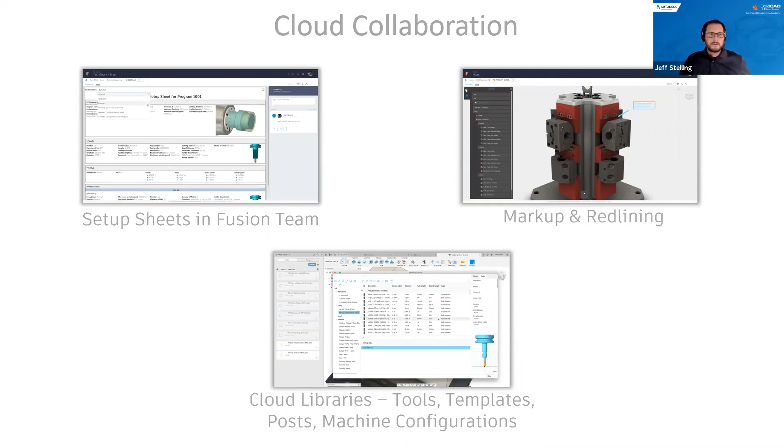I'm going to steal this share here. Can you see Fusion? Yeah, I got you, Jeff.

Okay, I was talking about the cloud-based access to the files at all times. I'm going to make a change on this file, and I'm going to have Mike have it open on his end. As soon as I make these changes, he's going to be able to open up the file on his end, the change will be automatically made, and then he can regen his toolpath.

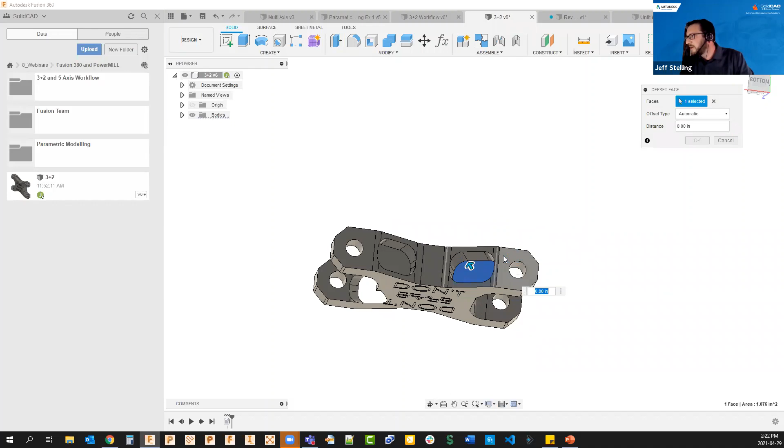Just let me know when you want me to steal the presentation, Jeff. So I'm going to make a couple quick changes here to the model. Sorry about that. And I'll change this one right here too. Forgot to hit OK there. And I'll change this one.

So what I'm showing you is how easy it is to make design changes. If your customer contacts you and says that there's been a design change to the parts you're making, we can easily make these changes.

And being connected, as you can see, I can see that Mike has this file open already. I've made the changes to this file. So Mike, if you can share your screen, we're going to show you exactly how the ability to have the changes automatically made works.

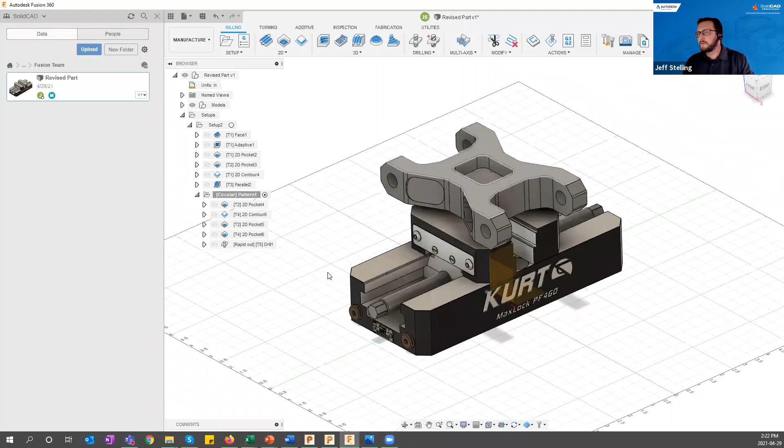Okay, so you got my screen here. You can see the part that I have. And now, if I go up into, which one is it here again, Jeff? Sorry Mike, I'm just saving the piece right now. Okay.

And like Jeff had mentioned, I can actually see up here at the top, it gives you a real-time view on what's happening, who's working on the part. I can see that he's just made a couple of changes in real time. So there's no delay, no worry about working with an old piece of CAD data.

So I was going to say, as you can see, Mike's getting the warning right there that the components are out of date, that there's been a change in design, and also on the model he's getting the warning.

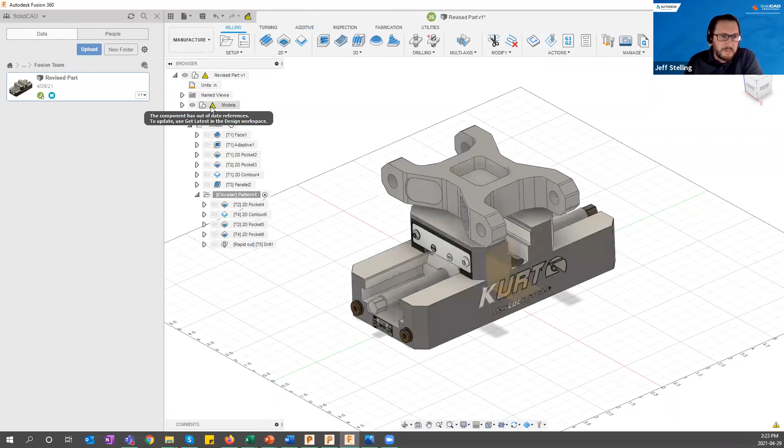So all Mike needs to do now is open up the models. Open up one more, Mike. Nope, there, right there. Okay. Yeah, you can just right click on that. Why did it not?

All right, do we need to? I'm going to jump back out and jump in real quick. Sorry about this hiccup here. That was this one down here, right? No, sorry, go into the Fusion team. Oh, there it is. You weren't, okay, there we go.

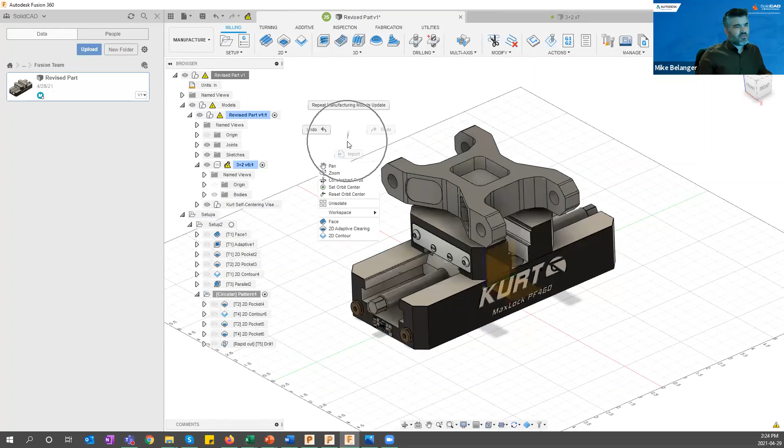All right, so obviously we have just a slight technical difficulty here with this. Basically, in the end, what's happening is you can see right here that there are different... Sorry, I was going to say, go into your design space.

Oh, that's it. So yeah, that's something we forgot to mention here. When you're in Fusion 360, because it's an all-in-one tool, we have a number of workspaces available. I was in the manufacture workspace where you're going to get all your toolpaths.

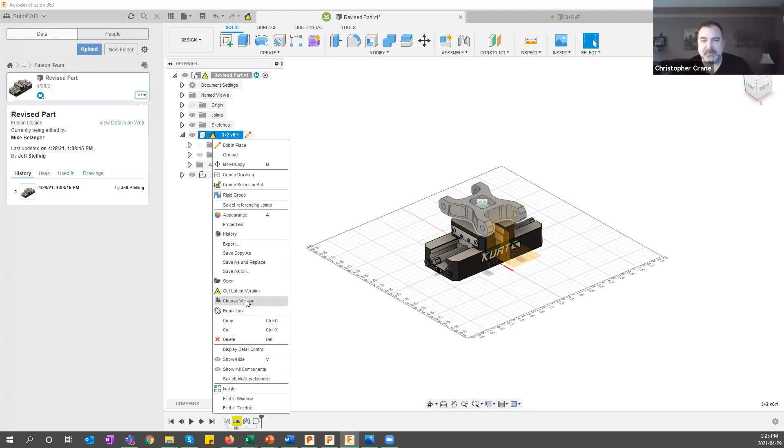This design portion is where now you can right-click on the model, choose version. So even though you're not in that workspace, Mike, it's still letting you know that there's been a change to that model. Exactly, and any stakeholders on this project are going to have the same data to work from.

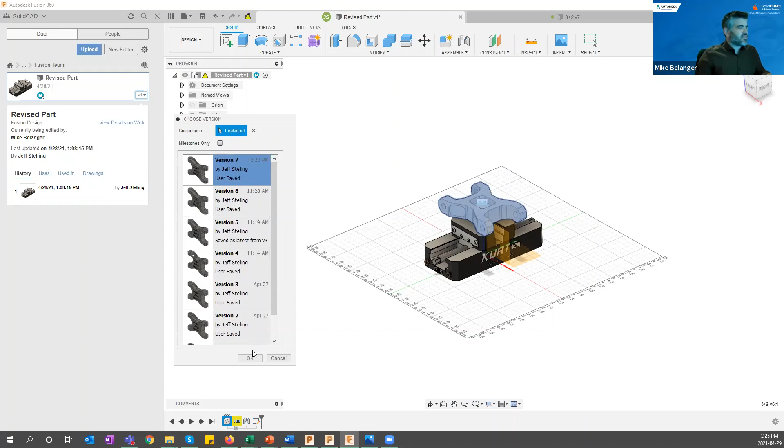Exactly. So if you look here, there's the current version that I'm in, the one that's highlighted. And I can see that this was last saved by Jeff 2 minutes ago at 2:23. So I can select this, choose OK, and it automatically updates the file.

And now if you go into your manufacture workspace, automatically it's letting you know that these toolpaths need to be regened. Just right click on setup there, Mike, and generate.

Now all these toolpaths are regenerating to the changes that I made to the file. So there's no more needing to jump to a third-party software, make the design changes, export it out as a STEP file or Parasolid file, email the change to the programmer or machinist, and then reprogram it. Even with the little hiccup we just had, within a few minutes our model is changed and programmed.

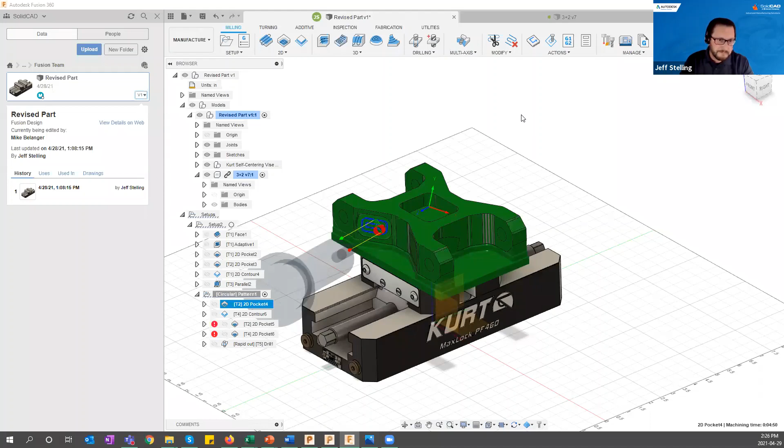Was there anything else you wanted to show on this one, Jeff? No, that was it, minus the few hiccups. I just wanted to show the ability to change. I'm changing the model on my end, and on your end you're able to receive that new design revision right away and update your toolpaths.

Excellent. Okay, I'm gonna share again. There we go, we got you. Okay, next slide to the parametric modeling. So that's on your screen now. Okay, so you want me to, let me go like this real quick. I'll let you share again, Mike.

Okay, so parametric modeling. What is parametric modeling? Parametric modeling is a design method that sets parameters instead of dimensions to specific parts of the model, the entire model, or specific parts of the model. Using this method allows users to easily change the model while keeping the integrity of the design. This allows you to reuse the same design for multiple projects.

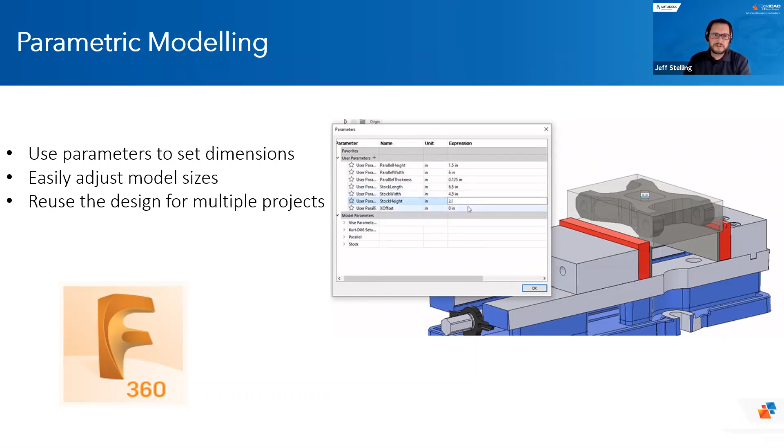Okay, you can see Fusion. Got you. Okay, so right here you can see I have all my toolpaths programmed for the first setup of this part. Now let's say I come from a job shop atmosphere where we did components for tool and mold, tool and die, automation, robot components. A lot of times you would get parts that had multiples, 10, 15, 20 of the same model.

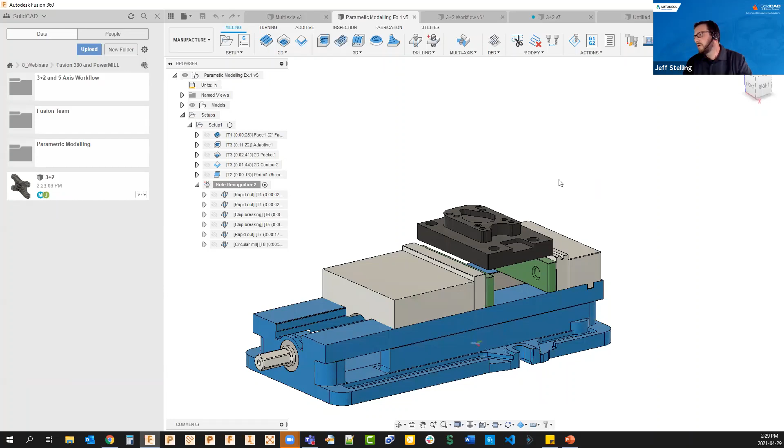Most of the time, either the customer would let you know that they're all squared up to size and you would program it as so, or you had someone in your shop mill them to a certain size and you programmed them for that size, putting them in the vise one after another. A lot of times what I've seen is you go through about 15 of them, and the last 5 either have too much stock or weren't squared up properly. A lot of the time you have to reprogram that, create a new stock model, and so on. With parametric modeling, I'm going to jump into my design space.

As you can see, I have my stock - that's how I've cut my first 15 pieces. If I jump into my parameters here, you can see I have this vise and my stock designed using parameters. So simply, let's say this stock, my last 5 pieces were... sorry about that.

Let's even go a little bigger just to show it off. My last 5 parts I have were adding a half inch of extra stock. Now I could set all those up in the vise, mill them to the size of my first 15, and then continue with my original programs - but it's very time consuming, a lot of wasted time on the machine. So what I've done just by using parameters, I've added that extra stock.

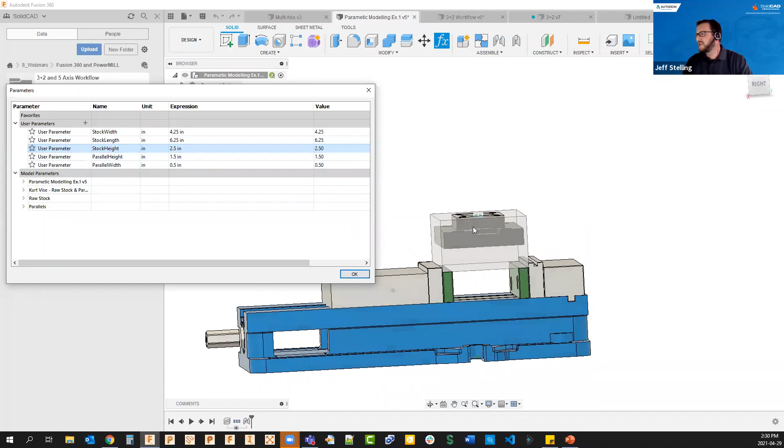You've seen my model move up in the vise - I'm still sitting on the parallels. I'll jump back into my manufacturing space, and again it's telling me I need to regenerate all my toolpaths. Just after a few seconds, you can see all my toolpaths are regenerating.

And in a couple seconds, I'll be ready to finish those last 5 details. There wasn't any reprogramming, no squaring up the extra details on the machine, no time taken away from the machine.

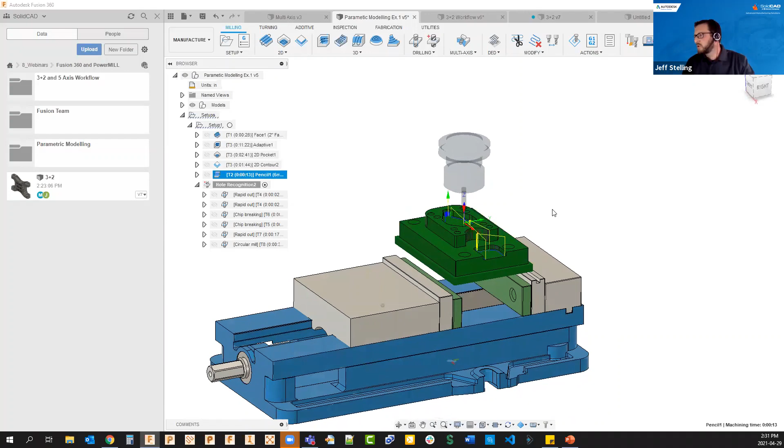As you can see, there's all our toolpaths at our new height of stock. And since I'm in this workspace, let's start looking at some of these actual toolpaths here.

So one thing I want to point out is, in Fusion, these are all our 2D toolpaths we offer. Adaptive clearing, pocket, these are roughing toolpaths. Facing, the face off stock, 2D contours, slot, tracing, and then threading, boring, circular, these are all toolpaths to machine holes, circular pockets. And then we also have over here the options for 3D toolpaths. Again, adaptive clearing, pocket clearing for roughing, and then a plethora of finishing toolpaths.

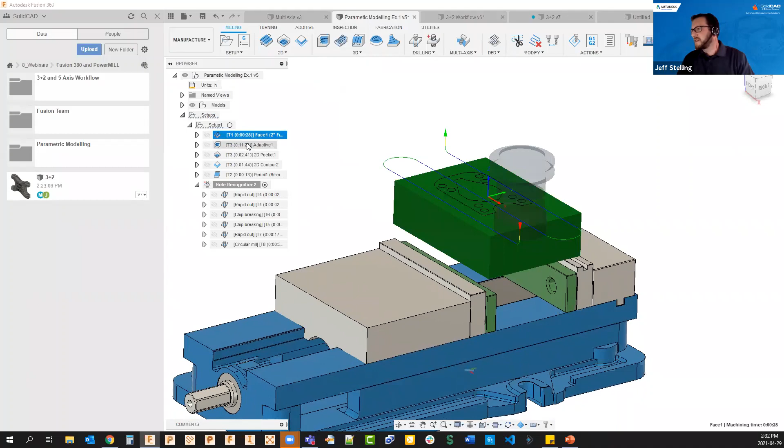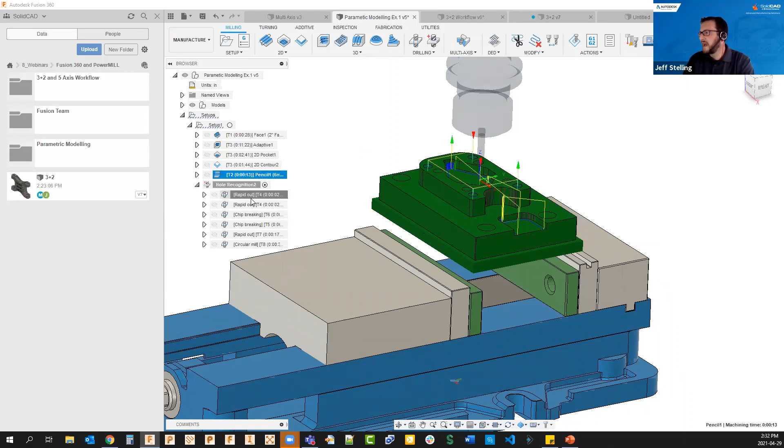I'd like to point out, as I click on each toolpath, I'm not activating it, I'm just clicking on it. You can see the toolpath segment and you can see the stock. So as I go down the line, this is called in-process stock. It's tracking the stock after every toolpath. I haven't had to add these to a stock model, I haven't had to calculate anything else. It's just as I go down, it adds all these. It tracks the stock, so it's a very good visual tool to see what stock is left over and where we still need to machine.

Okay, so that's this first setup. Now, let's say we had to do a second setup on this. I mentioned before that because we use parameters, we can use the exact same vise model. I'm going to need to open it up here. So I'm going to show how within just a minute I can get my second setup ready to go.

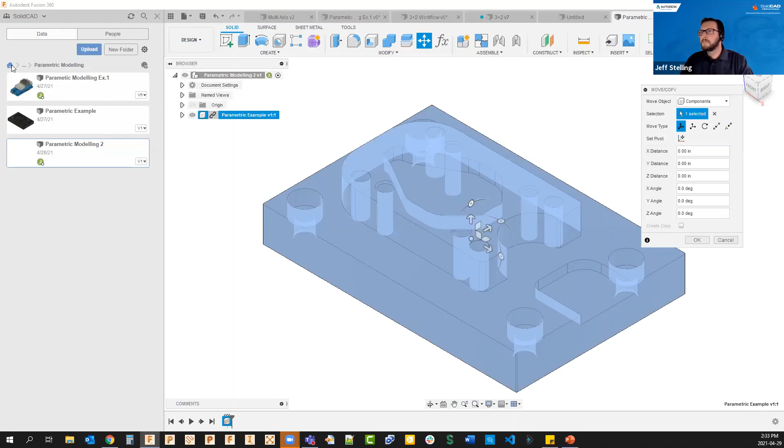Okay, that didn't quite open up there. Okay. I'm just going to bring in my vise. It's taking a little longer than I expected. Okay, there we go. So now my vise is in there, and you can see my stock is all set up.

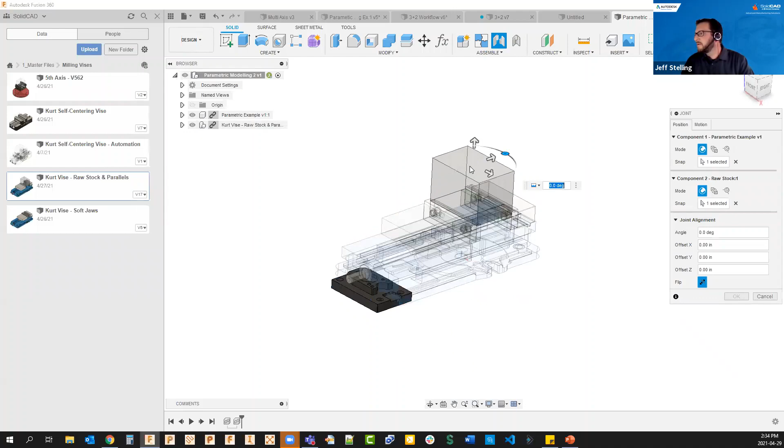Clearly that's not the proper size I'm going to want. I'm just going to shut this off right now. So just quickly, I'm going to add a couple of joints here, and turn my vise back on.

I'm going to flip this over and put it offset, since I'm just going to guess there's a 1/2 inch of stock on the bottom. I'm going to go into my parameters. Oh, before I do that, I have to break the link. That's a good example actually. It won't let me make any changes to this vise because it is from another design, unless I break that link. So as soon as I break the link, now I'm free to make any changes that I need to.

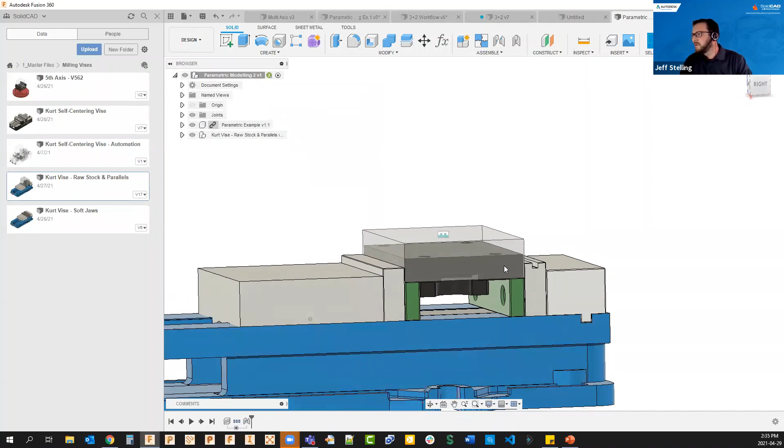Now if I just go... so now I'm ready for my second setup. I'm sitting on my parallels, I've got my 1/2 inch of stock. I'm going to go into my manufacture workspace, create my setup here. That's the one I want.

Now I'm just going to, since I know the size of my finished model, add those in. I know I had added... sorry, my mouse is a little finicky today. And then just like that, my model is set up with the extra stock for setup 2.

Just going to make a quick face mill toolpath to remove that excess stock. That's good with that, multiple passes. Let's go here, let's just say...

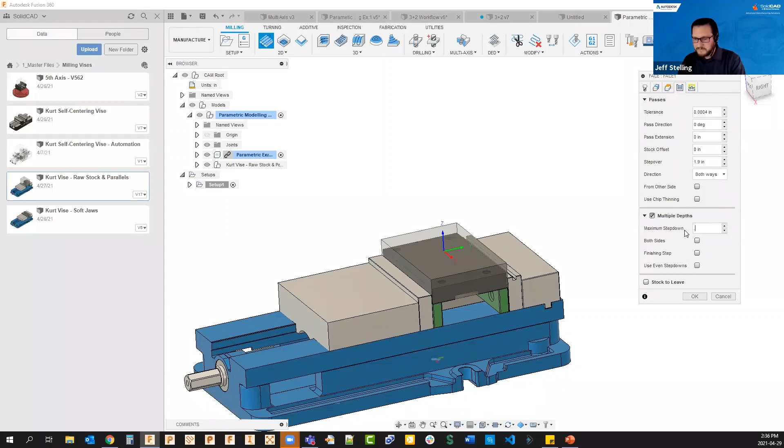And then within a couple minutes, I have my second setup using the same vise model that I used for my first setup, just by adjusting a few of the parameters. I now am ready to go for my second setup to take off that excess stock. And that's how you can quickly utilize parametric modeling in an everyday workflow in a shop atmosphere.

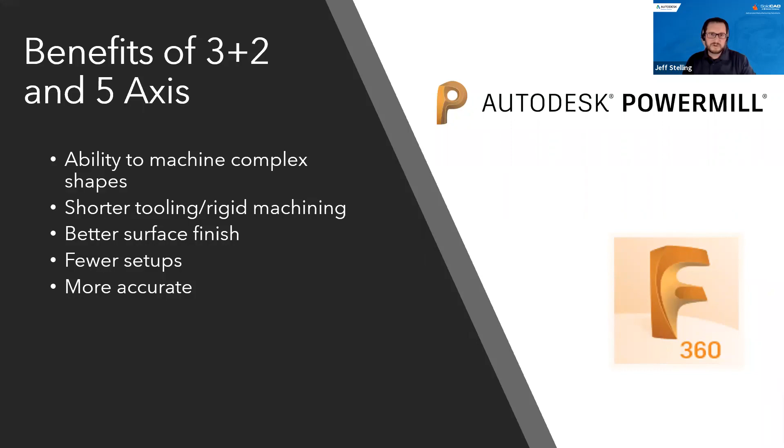So I just have this little fancy model here that we just looked at with Mike. I'm just going to show you how you can quickly create a 3+2. I want to machine these pockets on the sides.

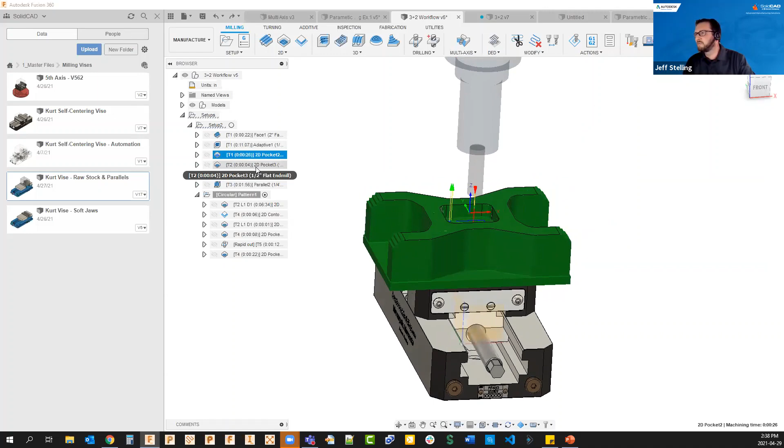I've already gone through my 3-axis toolpaths, my roughing, my finishing. All these are finished. You can see I'm tracking my stock. My in-process stock is showing me that all I have left are these holes in these pockets. Now I do already have them finished here, but I'm just going to go ahead and create another one.

So I want to create a 2D pocket. So right away, I'm going to grab a tool. No, I'll stick with the 1/4 inch tool. Just by clicking tool orientation, I'm going to select how I want it oriented. Just by that, I don't have to do any measuring. I didn't have to create a work plane. I just select on there.

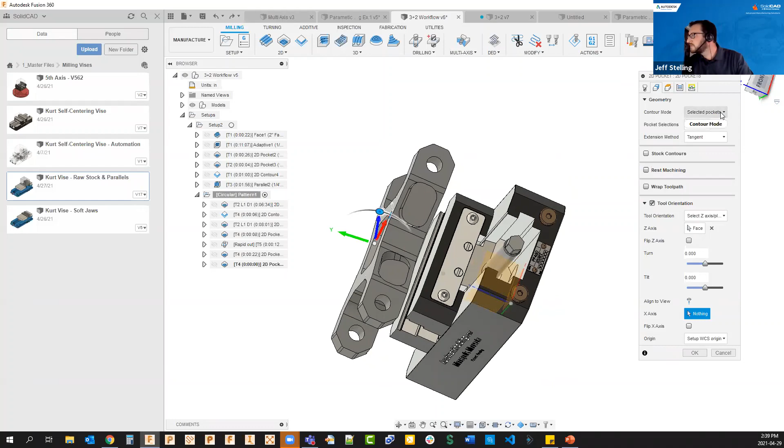And then I'm going to select my contour, and I'm going to make a couple changes here. And just like within a minute, I have my pocket ready to rough out. Now it's still loading. There you go.

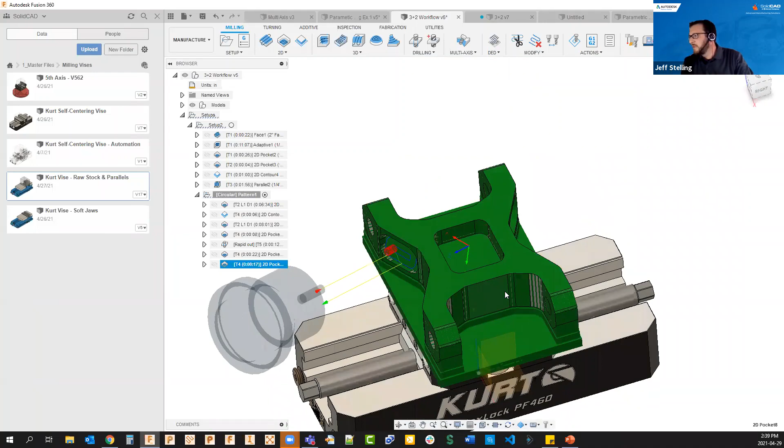So as you see, now that toolpath is roughed out. So now, most likely you might have a print for these, but I'm going to guess that these are symmetrical. So I could create a toolpath on this pocket here and then over here. But what I'm going to do is add to new pattern. I'm going to say circular pattern.

And now I just have to choose what axis I want to use. So I'm just going to look at this one right here. And just like that, now I have a toolpath on each of these 2 pockets. That's such a simple way to create some 3+2 toolpaths there.

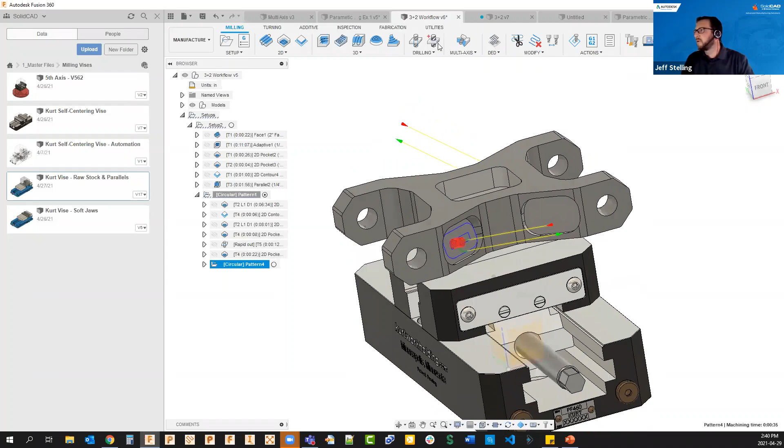Now it'd be the same thing if I want to create a hole. Better choose a drill here. Tool orientation - just going to select how I want my tool to be oriented. Select my holes.

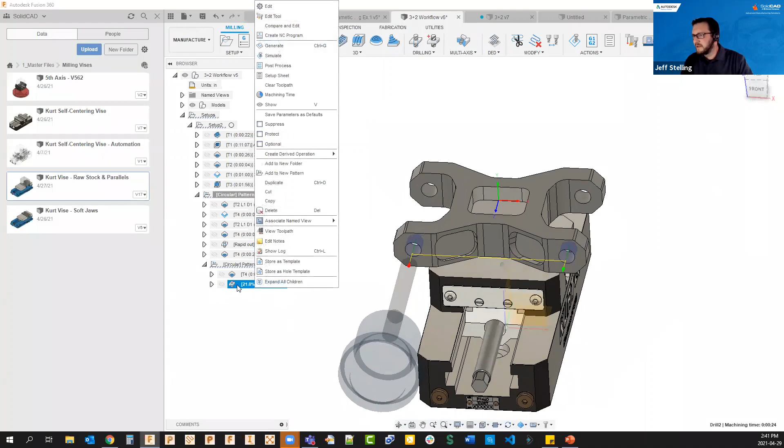And just like that, now I have 2 holes to be drilled on a 3+2 setup. And again, I can add to a new pattern. And within a couple minutes, I now have my 4 holes that I need to drill on each side of my piece.

So in a nutshell, that is a very simple way to create 3+2 toolpaths in one setup. Now I have already machined this whole model. I have all my side work completed. Now to look into some multi-axis. Sorry, I just want to look at something here.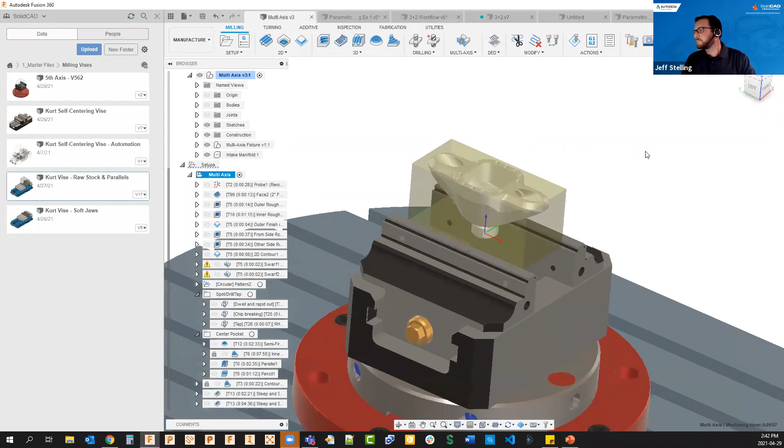So Fusion also offers some multi-axis toolpaths. Right here we have a swarf, multi-axis contour, and a rotary toolpath. Rotary toolpath is more of a specialized toolpath that utilizes the rotary axis of a machine on a mill turn machine. Today I'm going to look at 2 more of the popular ones, which is swarf, and then over here in 3D, steep and shallow. Now this steep and shallow toolpath, that's the powerful toolpath that has been borrowed from PowerMill, which I'm not sure if Mike will be showing off or not today. Oh, we might touch on it. Okay.

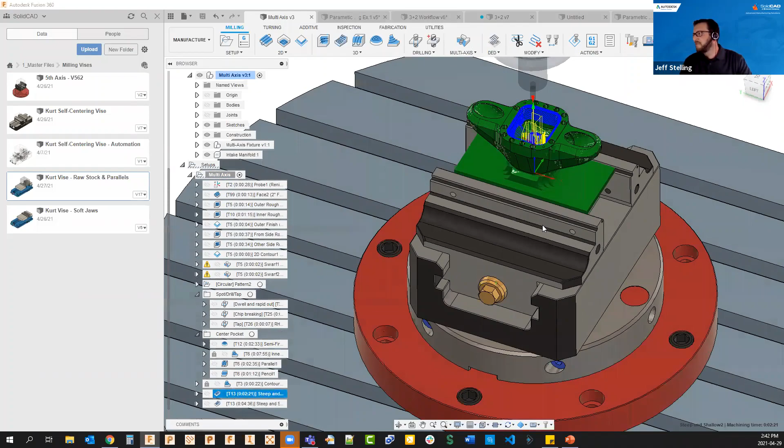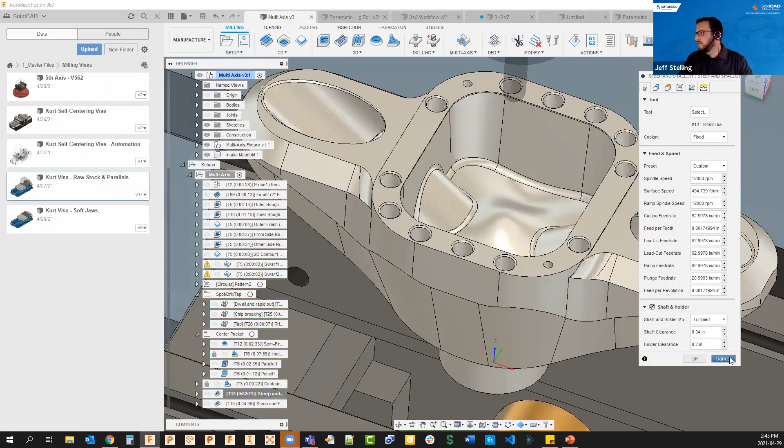So I'm going to just select this toolpath here to show you the benefits. This is a steep and shallow toolpath, just the three-axis motion. There's no multi-axis. As you can see, it's only machined certain parts of the wall and down below in the center here. The reason why that's down here, I put a collision on the shaft and holder of 40 thou and 200 thou. So what Fusion is doing as it calculates, it's looking at those values, and this is telling me that to stay with those values and avoid collisions, it can only machine these certain areas.

That's fine. I could go and put in a longer tool. I could adjust my tool right on the fly, but then with a longer tool, the finish isn't going to be as good. We're going to get a lot of chattering, possibly some gouges. So a better way to machine this pocket is using multi-axis. As you can see, now I'm getting everywhere on this pocket, everywhere in the bottom corners.

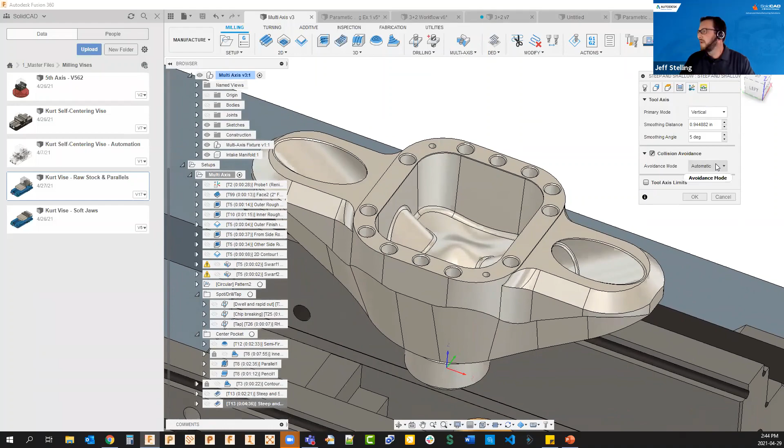And to show you how I did that, all the values are the same. I'm just going to jump into the multi-axis. In this steep and shallow, you have the option for collision avoidance. What collision avoidance does is it will keep the toolpath as a 3-axis as much as possible until it gets in that value range that I put on my shank and my holder. Once it's going to violate that value, it will now automatically tilt away to keep that value in a range.

And just to show you exactly how that works, I'm going to simulate this. Might just take a couple seconds.

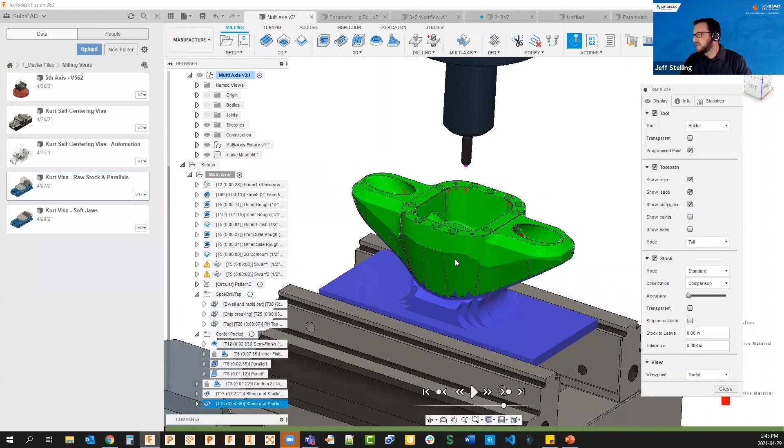Okay, so now we're ready to simulate. I have a few options in my simulate. You can do a comparison, which will show you what is in range, what's finished, if there are any gouges, if there's any remaining stock. I can just have the operation show a different type of material. I'm just going to keep this on operation.

I'm going to slow this down a little bit, and then speed it up. So here's all our 3-axis toolpath, the 3-axis vertical. Right now, it's not going to violate the shank or the holder clearance, so I'll just keep moving to speed this up a little.

Don't want to be taking too much of Mike's time. I'm going to stop this as soon as we start, which I think is right about here. See there, now it's tipping away.

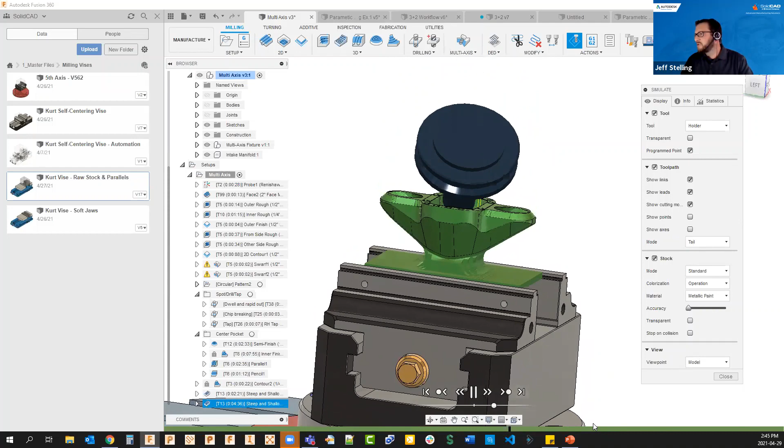You can see that holder is getting right down in that pocket, machining all those bottom corners, keeping those values that I put on my shank and my holder. It's a very powerful toolpath. You're gonna get a good, nice surface finish. Your tool is gonna stay rigid.

Speed that up a little bit. That was one of my favorite toolpaths from PowerMill. You can use it all the time. That collision avoidance can be a lifesaver - it allows you to use short tools most of the time.

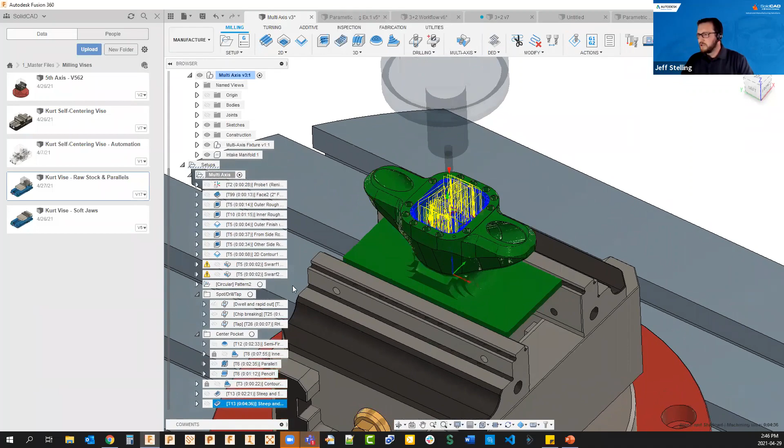Now I'm just going to show you a swarf toolpath here. Swarf is under the multi-axis. This is another toolpath where you can tell it what type of sideways, what type of tilt you want on it. All I'm going to do is simulate this - cancel that.

Give it a second to load, and you'll simply see - let me slow this down - you'll simply see the tool is staying along these walls here of the part.

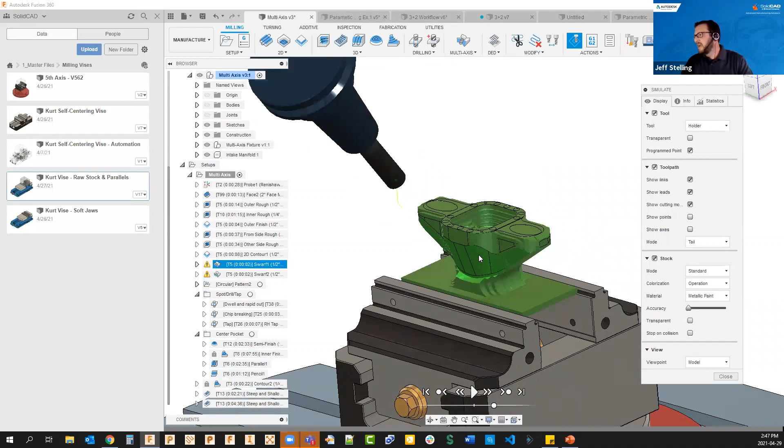If we couldn't use a multi-axis, then we would most likely have to either set up on a 3+2, rough this out, maybe pick it out a little bit, or even worse, set it up, do a second setup, and machine that - and then you take the chance of this not perfectly blending in with your toolpaths from your 3-axis setup.

And so right there, those are the two most powerful multi-axis tools that Fusion has to offer right now.

Absolutely, two great tools that they've added into this software, and it's only growing. It's such a young product that they're putting so much technology into. I love to see all of these advancements in it.

Like Chris mentioned, they have one of the largest teams of developers, and Fusion is constantly updated - I think just yesterday or today there was an update. Another benefit of it being a cloud-based software is you don't have to go looking to see if there's an update you need to download. It automatically updates you - you open up Fusion, turn it on, and it'll let you know if there's an update or not. For sure, you're always working with the latest and greatest version. That's very important.

So, if I think that brings you to the end of your segment, eh Jeff? That is my segment - thanks to everyone for sitting through that, minus the few hiccups that we had. Yeah, couple technical difficulties. It's the age we're living in now, but the downfall of live webinars.

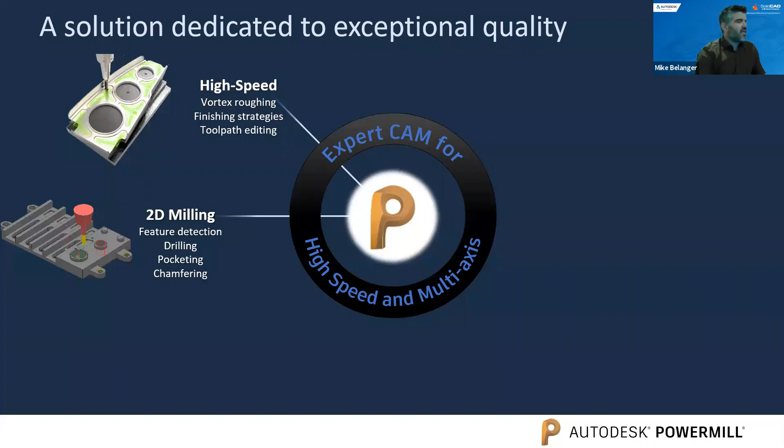So basically this slide - I do like this slide. It gives a really broad view on what PowerMill does, because anyone that uses it, even someone experienced in PowerMill, a lot of times doesn't realize how much flexibility and function it actually has. The one thing we all know is its high-speed machining - you do your vortex roughing, your high-speed finishing strategies, all your strong toolpath editing with PowerMill, transitioning from the Fusion side, that is. It also does your 2D milling, just like any CAM package would, but it has that feature detection. It does your drilling quickly. It has your pocketing, chamfering. It does your 3+2 machining.

So this is where we start getting into some of the more advanced and big benefits to PowerMill. You have tools like your dynamic machine control, your stock models, your process control, all that flexibility. Then you have your 5-axis finishing.

That's kind of PowerMill's bread and butter. That's where they set themselves apart from the pack. You've got your swarf finishing, your tool axis control. That's the big one for me, that tool axis control, the ability to force it to do what you want.

Motion optimization. There's also a small mill turn package in there, so you can do some basic mill turn if you need to.

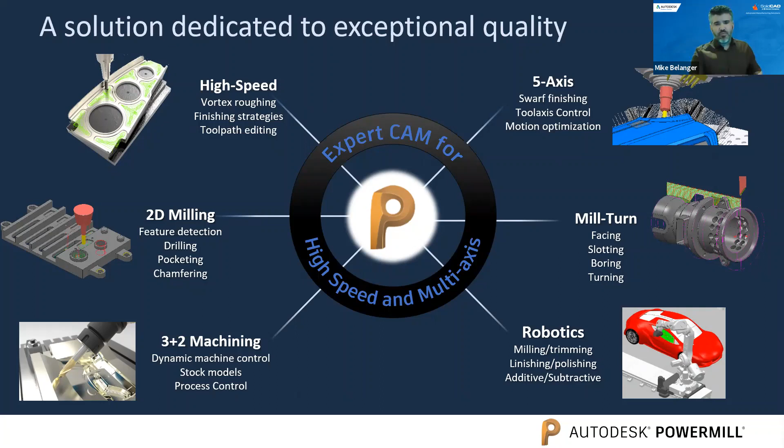There's also a plugin for robot. We're not going to be talking about that today, but if anyone has any questions, reach out. It can control actual machine robots for milling, trimming, polishing. It even does additive manufacturing, because you can get a welding head for it, and then some subtractive manufacturing if there's a spindle on the robot itself.

And then there's the big one that's becoming more and more prevalent: automation. User-defined macros, machining templates, and custom toolbars. But honestly, it doesn't just stop there. The automation can be so far customized. PowerMill has left their platform open to be able to create your own plugins, your own processes. You can have third-party software interact with PowerMill, and you can drive it to do processes you may not even realize are available. We'll talk about that more on another day.

So let's just jump quickly into my demo, what I want to show. I'm gonna try and go through this fairly quick to try and save us on time here, and we'll get into it.

As you can see here, we have the PowerMill layout. It's similar to Fusion in the sense that we have the Explorer along the left-hand side. We have the tabs along the top. That's all fine, and if you look through the tabs, there's just each set of specific functions in each one.

The Explorer, I've always liked that, because what we have is an ID and information on everything you have currently created, from toolpaths, boundaries, NC programs, which is posted code, so on and so forth.

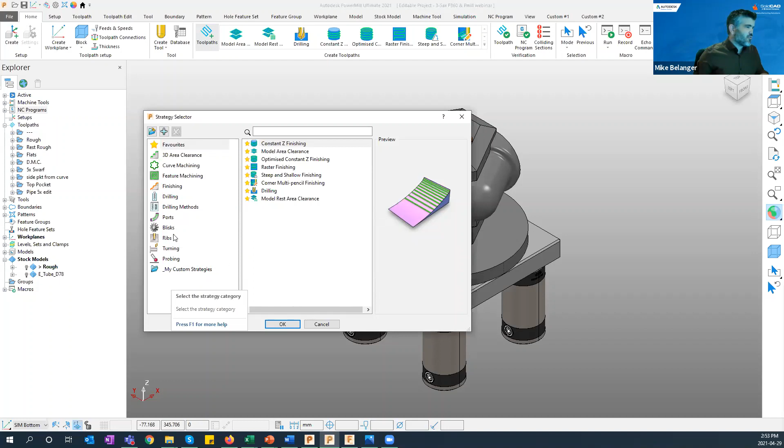If I go over to my Home tab and take a look at the toolpaths, I can open up the strategy selector, and right away I can see all of these options I have for finishing. And I'm not talking about these options just because these are folders with extra items in them - as I click on each one, there are a tremendous amount of options to create toolpaths in PowerMill.

So really the possibilities are endless. And the nice thing I do like, let's say for example these finishing strategies, you can make a finishing strategy, 3-axis, then all of a sudden there's an issue with some kind of collision. If your machine has the capabilities, a small edit inside that 3-axis toolpath gives you a 5-axis toolpath that quickly.

Let's jump into the technical portion of it. So right away, you're going to see some folders along the left-hand side here. If I look, there's my set of roughing toolpaths.

Nothing too groundbreaking, PowerMill does it, PowerMill does it very, very well. Jeff talked about the different styles in Fusion 360, the adaptive roughing - PowerMill has that as well. We can do the adaptive roughing.

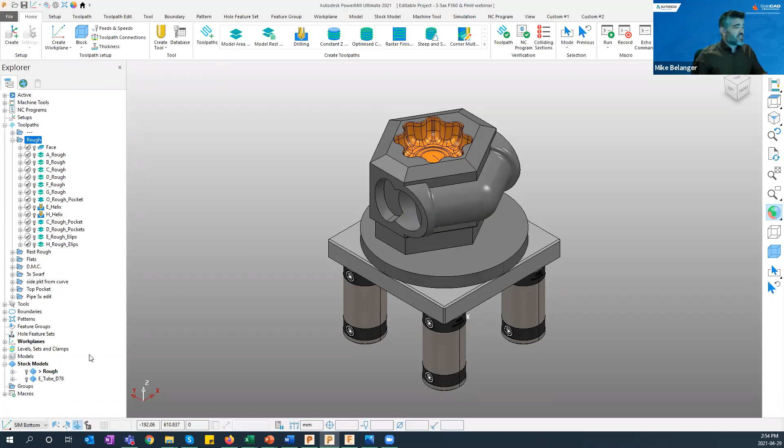We can do the stock management. PowerMill has what we call stock models, where it can manage stock and responsibly manage this material with whatever process we need for the next step. And with the stock model, you're going to see an actual representation of the material left behind.

As you can see, there's maybe some stock right there, but I'm not going to dive into these toolpaths. I just want to make sure everyone's aware that it does do roughing, and it does it very well. It does rest management, so it's only attacking the areas that need to be attacked.

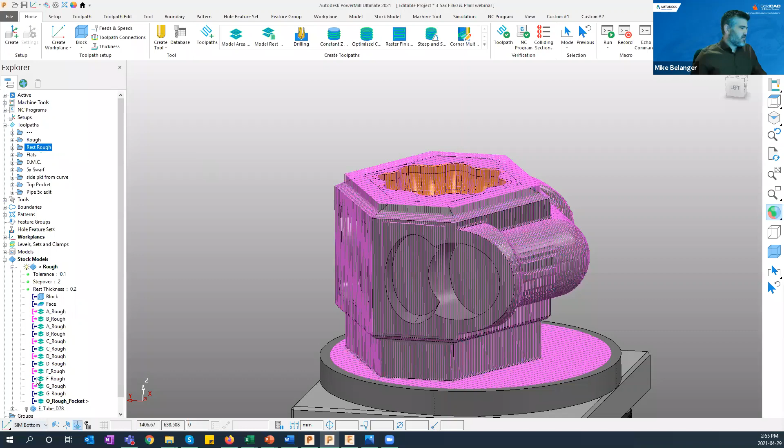All right, so I have some more flat toolpaths here, again with the 3+2. This is where we start setting ourselves apart from some other CAM packages. So this isn't too groundbreaking, but here we go.

Here's our flat toolpaths. Now, the one thing I like to notice about these flat toolpaths are the leads and links. In PowerMill, when you create a toolpath, the toolpaths come up this green color, right?

And then these orange moves are the leads and links. If we have a toolpath that looks something like this, you can see there's a jumping link move over from one side to the other. If we're not happy with that move, all we need to do is open up this form, change it to whatever style link we need, and hit apply.

It updates the toolpath almost instantaneously, depending on the toolpath size. So we don't need to recalculate any toolpaths. We just need to update the toolpath with the new leads and links settings.

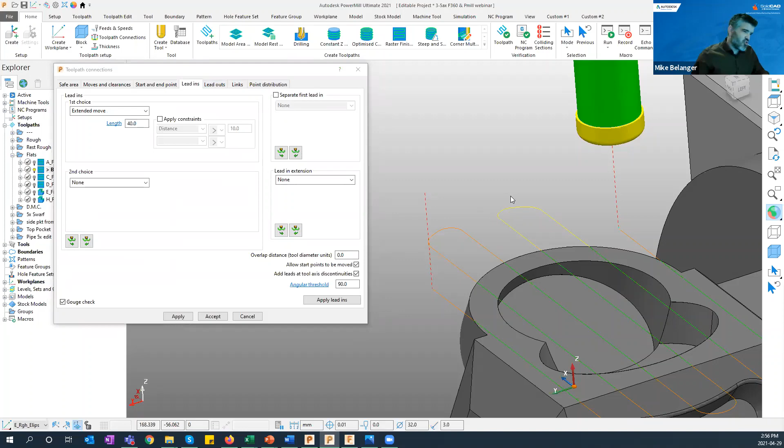And that goes for the lead-ins, the lead-outs, which are these extended moves, and then the joining moves. You can also update your safe heights, your start and end points, all with a simple update and calculation inside this form without ever having to recalculate a toolpath.

Now, if we're talking about this toolpath, sure, it takes 5 seconds or less to calculate. But if we're talking about a toolpath that took you 20 minutes to calculate, that's a serious time savings.

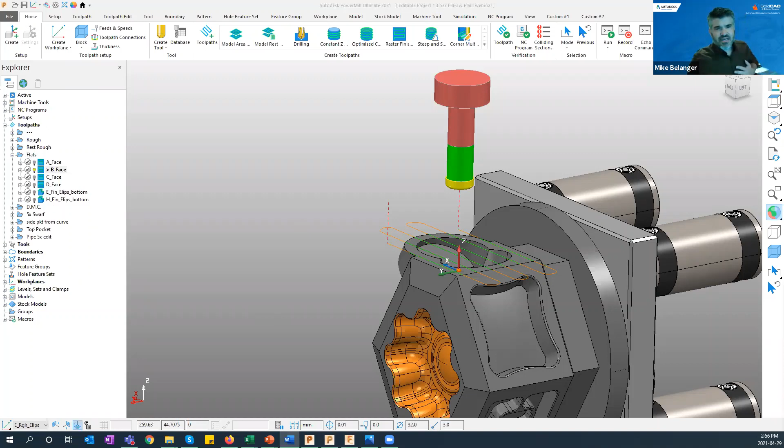Okay, next on the list, I'd like to talk about some collision checking. So I'm going to go over here to this toolpath. And as you can see, we've got a 3+2 toolpath.

If I do a quick simulation, everything looks fairly good. The tool is going back and forth, back and forth. But what we didn't notice is that the holder is actually colliding.

And in PowerMill, you notice that you are getting a white check mark. So maybe even a new user would think this toolpath is perfectly fine. Well, it's not necessarily fine.

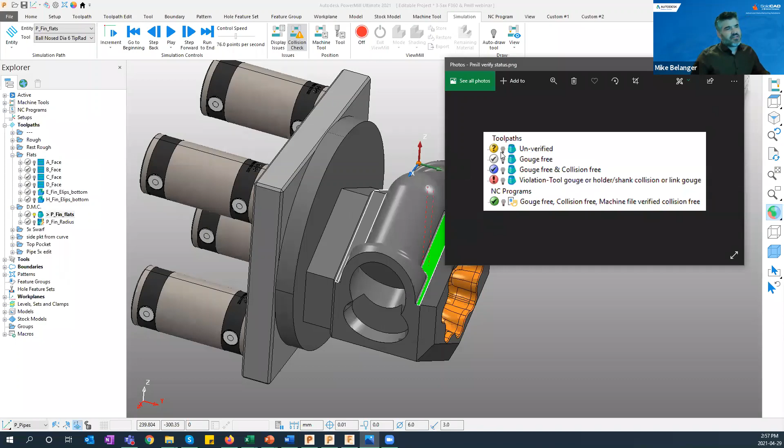PowerMill has different levels of verification. All right, just a real quick look at that. If you have the yellow, that means this toolpath is unverified. White means it's gouge free, which is essentially the cutting portion of the tool.

That's the cutting portion of the tool. The blue check mark is telling me that the holder and the shank are both verified as well as the tool. Red is obviously telling me there's a violation of some sort. And then this green check mark tells me I have full verification against everything, including the machine tool, which we'll talk about in a second.

So the reason I like to highlight this is because it's a very obvious sign that something is good or not good inside the software.

So I'll minimize that. Now on my home tab, if I quickly do a collision check on this particular toolpath, I should see a violation. There we go. Collisions were found involving the cutting moves. So I click OK, and I know I have a problem.

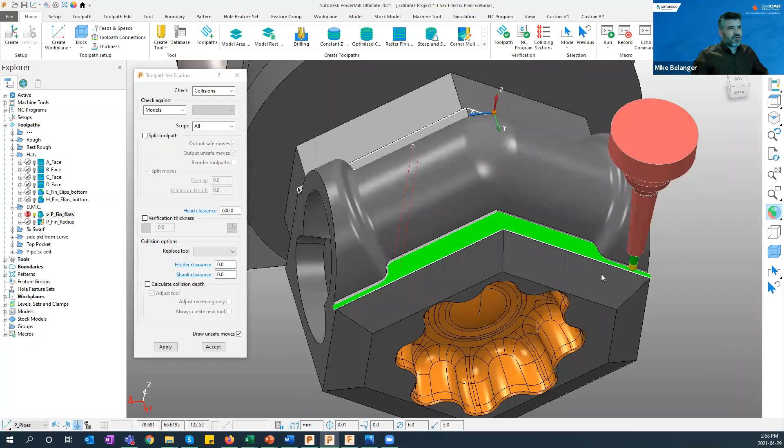All right, the collisions were involving the cutting moves. So what I'm going to do is use my colliding sections. I click on my colliding sections, and it's going to tell me where the problem is. All right, go back, run that collision check again, and it's actually updated itself.

Let me jump back because I'm going to show you something different. Let's go into this toolpath. Same problem, same tool going into the same areas. We have collisions.

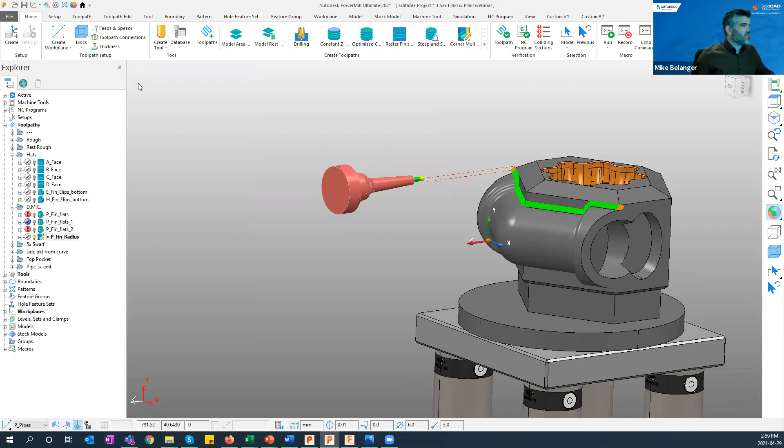So we're going to use the dynamic machine control. And when we use the dynamic machine control, I like to use the machine tool along with it. So I'm just loading up my representation of the CNC machine that the job will be run on, setting a couple of variables to ensure the environment is set correctly.

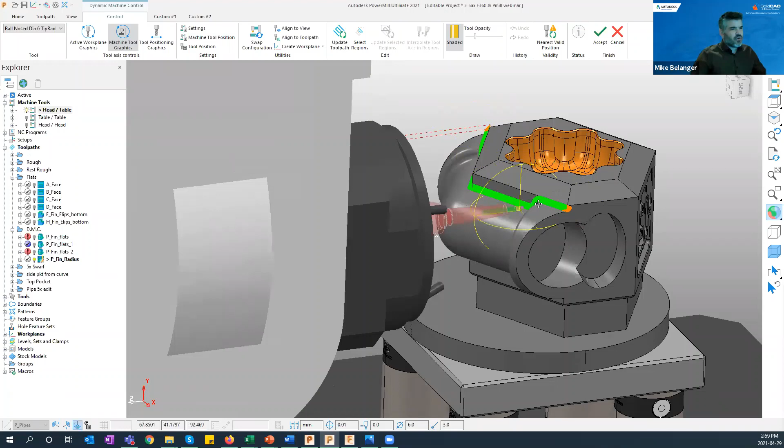And then I'll place the tool down in one of these areas. In the dynamic machine control, we have the option to move the tool around, get an idea of where the head, the tool, and the holder are going to be.

And then I can make edits by either adjusting the angle of the spindle using these grab handles, or using the machine tool position form and moving the slider bar, or typing in a value. Maybe I want a nice 45-degree tilt. So once I'm happy with the adjustment I've made, I simply accept those changes.

And then I can run the verification again. As you notice, the check mark has gone back to yellow because we need to re-verify since we changed the tool axis.

And now we have no collisions. Quick gouge check, and we have the blue check mark. Didn't have to recalculate the tool path, didn't have to create a new tool path. It just worked. All right, I'm going to jump over real quick.

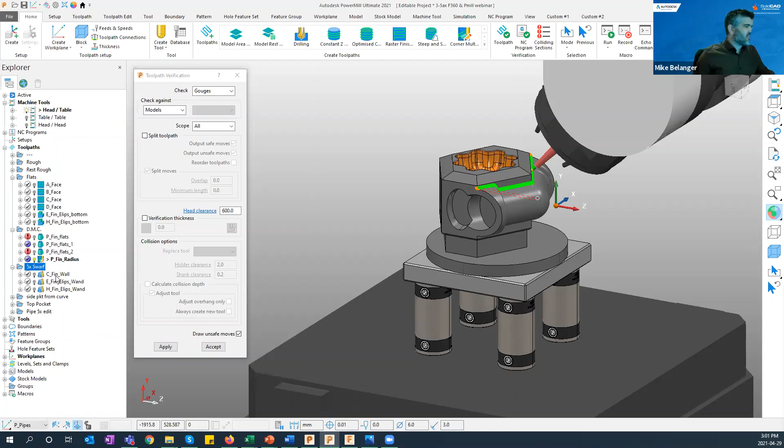Let's take a look at some other items. We have swarf finishing. Jeff was showing swarf finishing. PowerMill does it as well, and they do it very well.

And some other 5-axis tool paths here. So we have this pocket, we're doing a corner finishing down in the pocket of this job. Another option that we have inside of the software is creating a curve and driving the tool axis through that curve. So by simply making one change...

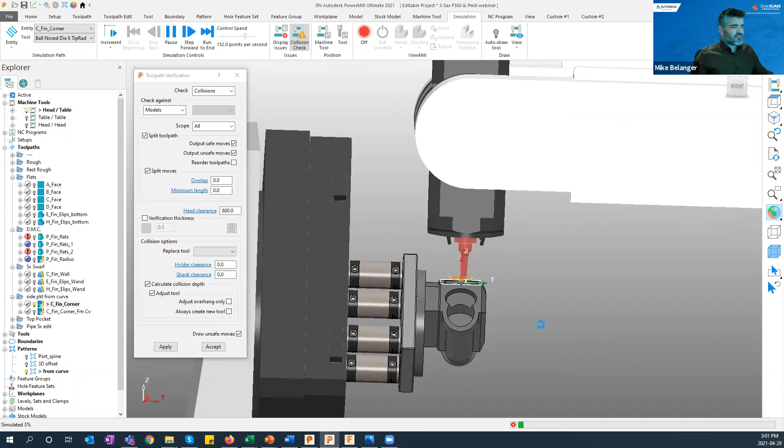Inside the toolpath creation, we go from a toolpath that goes straight up and down, possibly violating the holder. As you can see, it looks fairly rigid. This is a simple 3+2 toolpath. And with the flick of a switch, we now have a tool that's actually leaning away from all the walls to ensure safety, to make sure we don't have that violation.

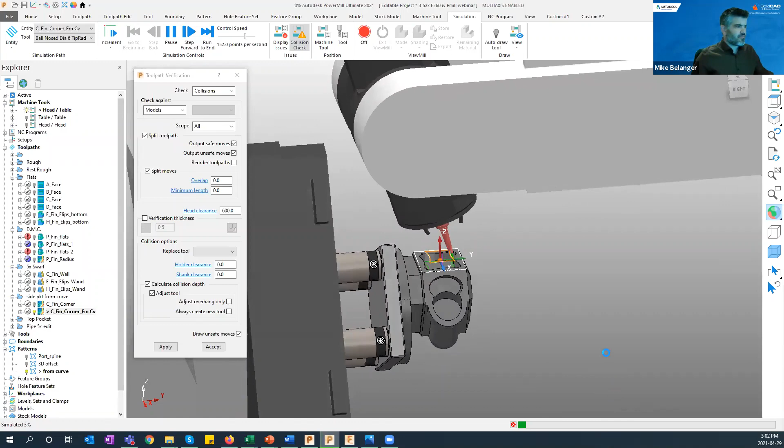Next example, we have a steep and shallow. Sound familiar? It was in Fusion 360. We have that option, Fusion obviously got that tool from PowerMill, very powerful, very easy to use tool.

So if we have our steep and shallow, we're cutting down these walls. We try and go all the way down, but the holder itself ends up colliding along these walls right here, which is fine because we know that we have...

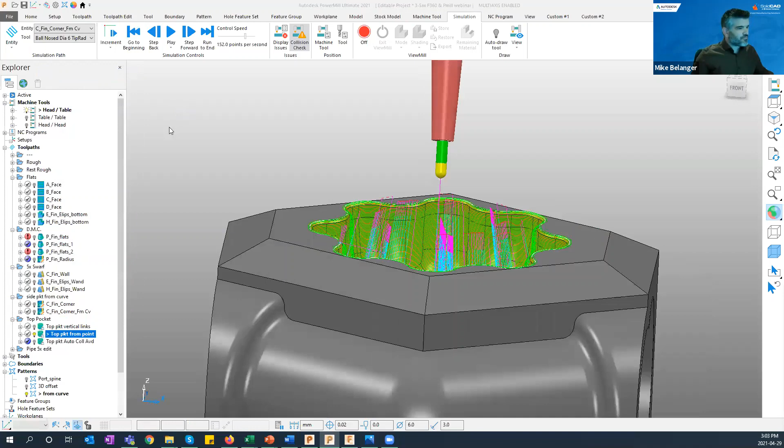Options inside the toolpath, and the first option I use is called from a point. So on the tool axis page, which is where we make our changes, I'm going to choose a point, an arbitrary point with an X, Y, and Z value up at the top, and the tool axis is going to drive through that point.

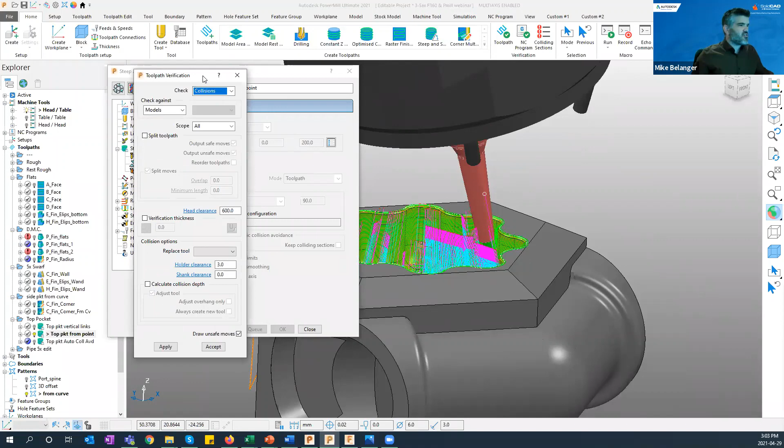But there's going to be an issue. As it goes around and continues to machine, it is going to have a violation down in these edges here, too close to the edge. And I can actually show you through the toolpath verification, collisions, models there.

Okay, so when we end up with an issue and there's still a problem, in this particular scenario, you can leave this setting the same or jump to what Jeff hinted to, which was the automatic collision avoidance, another tool that migrated from PowerMill to Fusion. So you can see how these different platforms are playing well together in using resources from each other. That's just another reason that having a development team in a company this big is such a benefit for everybody.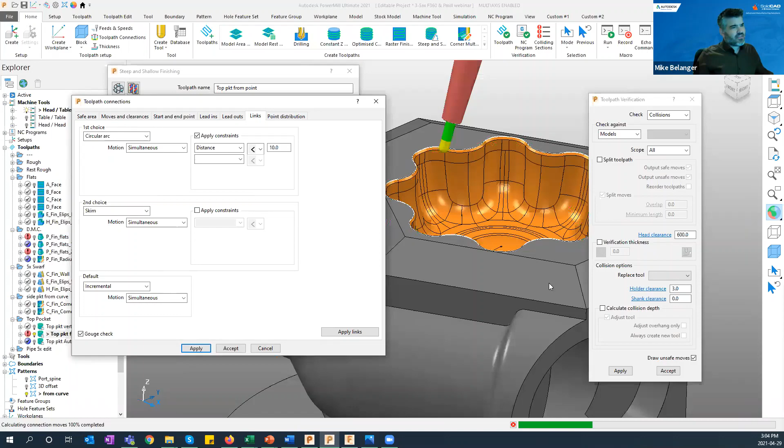All right, so there we go. We see that we do have collisions, and this is what I like. First things first, I noticed that I have a lot of poor leads and links. Well, I want to clean that up because that's clearly inefficient. So I just jump into my links page. I change these to, let's just say a circular arc, I hit apply. And just like that, my toolpath becomes very efficient, but I see all the problems that I'm facing here.

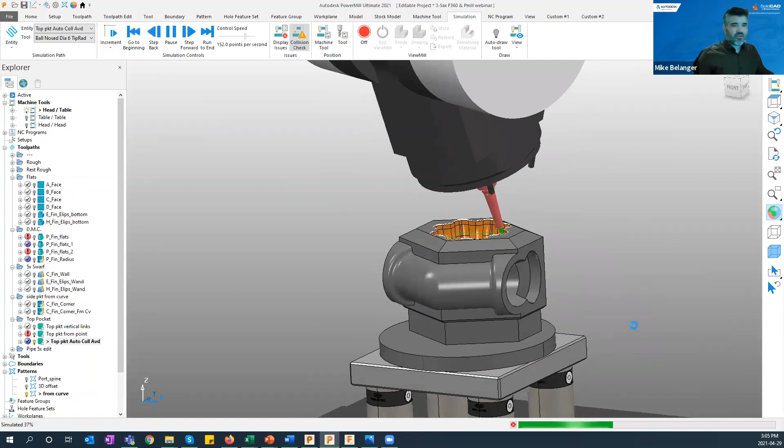All of these red areas are the spots on the toolpath where it collides with the holder. So to remedy this, what I did was regenerate this toolpath, but I used, like I just mentioned, automatic collision avoidance. So a quick change there in calculation gets me a toolpath that now automatically tips away. It's not from a point, it's not to a curve, it's not lean lead. It actually just automatically tips to ensure that there are no collisions within the parameters of what I've asked.

I'm going to show one more thing, and this is just lending itself to the editing portion of the software. So we have a toolpath that cuts this whole domed or piped area right here, but I know that there is a collision in these tight corners because of the size of the tool and the edges that are rather vertical, or steep, should I say.

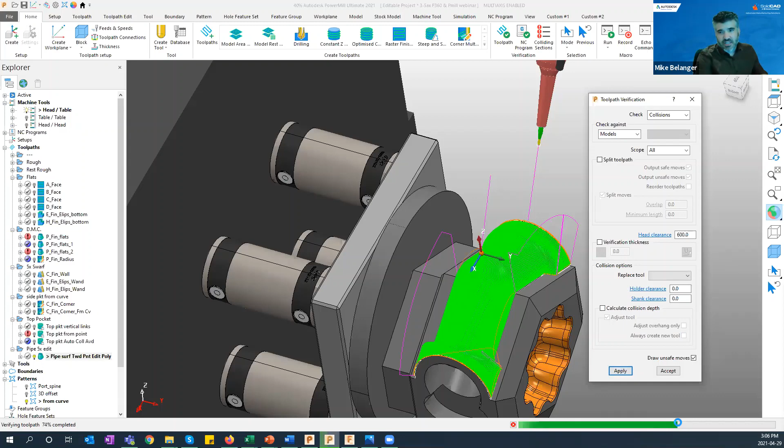So I'm going to do the same thing where I run this collision checking, and like it did before, it's going to show those colliding sections. And those colliding sections make it really easy for me to identify the bad areas, as we can see right here. And all I have to do is put myself into a top view and modify these with a tool called Edit Within Region.

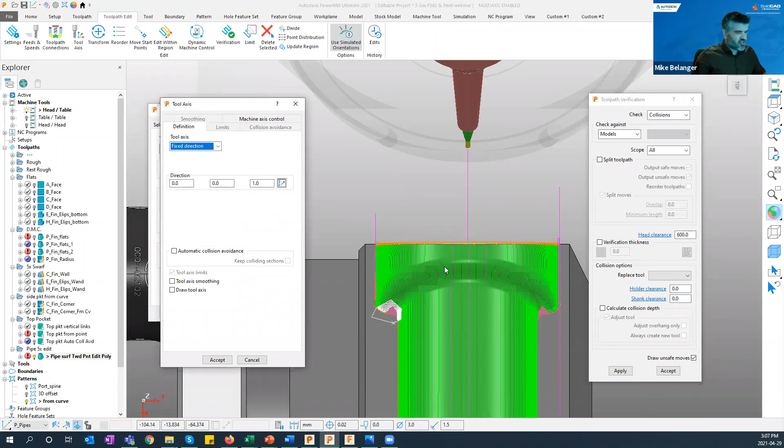So I'm going to select my region by just creating a polygon like that. And then I'm going to change the direction, so I'll say fixed direction of right there, so I'm just going to choose the view that I want to be in. And basically what PowerMill is going to do is the exact view that I'm in, it's going to choose that as its new Z vector. After I do that, put a little blend distance of, I'm in metric, so I'll say 10 millimeters.

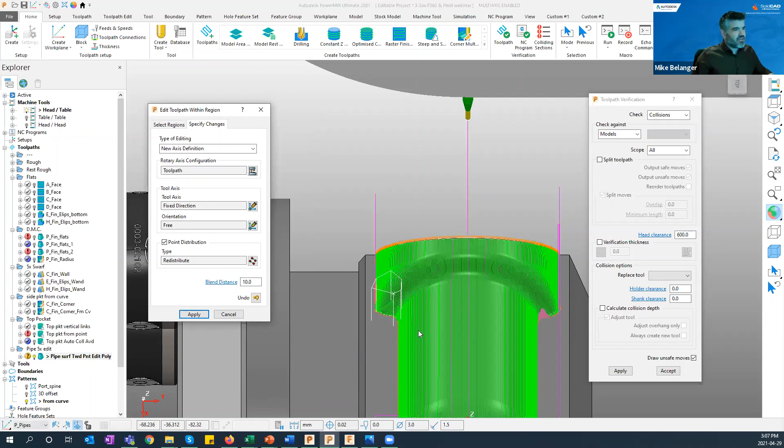I'm going to hit apply, and you can see that colliding section is gone immediately. But what does it look like? Okay, so the toolpath, as it comes around to the problem area, let's get it going the other way.

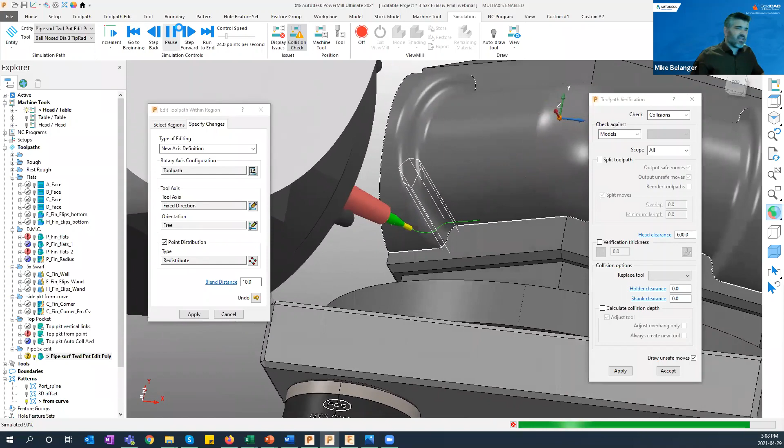There we go. As it gets to that area that I edited, you can see the automatic tilt back, and then it continues to go as the toolpath was created.

So a very quick, very easy edit to avoid that collision in a very tight, tricky area underneath the side, severe undercut, and the edit took me maybe less than a minute to do, as opposed to something like this, where it is colliding.

So right there, we have our collision. It rubs against the holder and goes. So the amount of movement, the amount of change is minimal, but just enough to avoid that collision. Makes it that easy.

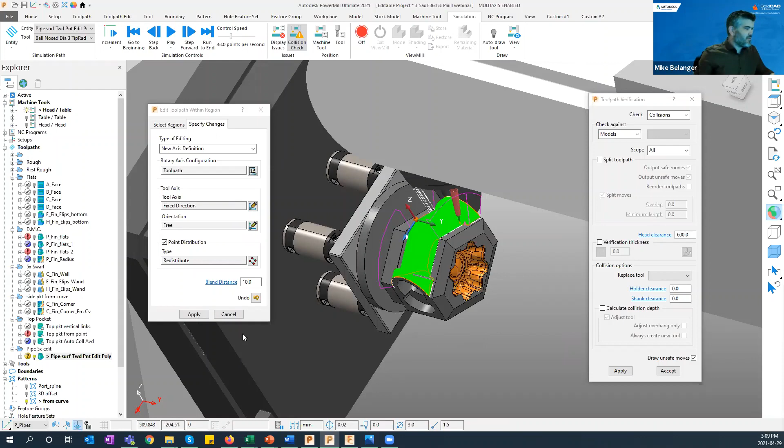One last thing that I'm going to show is the NC program verification. So what we've done now is we've gone through, we have our toolpaths, they're all safe. But how do we know that the machine isn't colliding into the job or itself, or possibly even hitting a limit? What we do is we take the toolpaths that we need, and I'll just take a couple right here. I know I'm going to have a problem with this one because there's still collisions on it, so I can show you what it's doing.

And I'm going to dump, let's just say, 2 of these toolpaths into an NC program right there. Inside an NC program, I can verify the whole environment, including that machine tool, like I mentioned.

Now, the great thing about this is that it's considering everything like I just mentioned. A regular PowerMill toolpath verification doesn't care about the machine limits. This does. Everything's built into the machine file in the post, and everything communicates together to get you the best result.

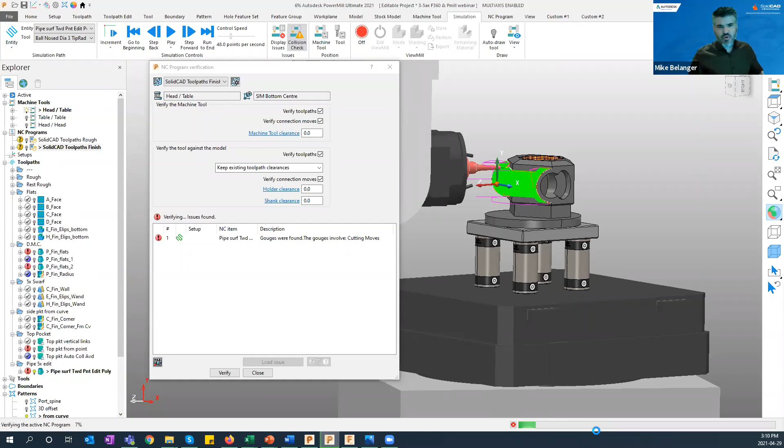So after I'm done this one thing that I'm showing you, and you can see it starting to populate the list, I think we're gonna open it up for any questions. And if there aren't any, we can close everything up and let everybody get on with their day.

All right, so there we go, machine verification. Now, I see that there's 3 issues. One of them is a warning, 2 is a problem. So I'm just going to double click on that first problem, and the tool is going to go immediately to that bad spot. All right, and there's that problem area that we already knew about. I didn't make the edit there, but I know what the issue is.

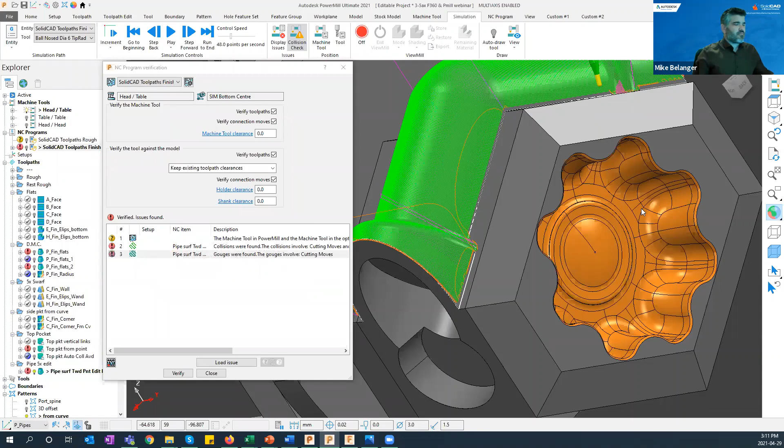Next one. Give it a second while it's thinking. Okay, and there's the second collision. Gouges were found, it involved the cutting move. So obviously there's some kind of gouge on the backside there.

At this point, what you can do is jump back into your editing tools, use your dynamic machine control, use your edit within a region, and get that safe toolpath, repost the code, get the safe verification status, and you have your safe to run toolpath, which you could run lights out because you have that extra assurance.